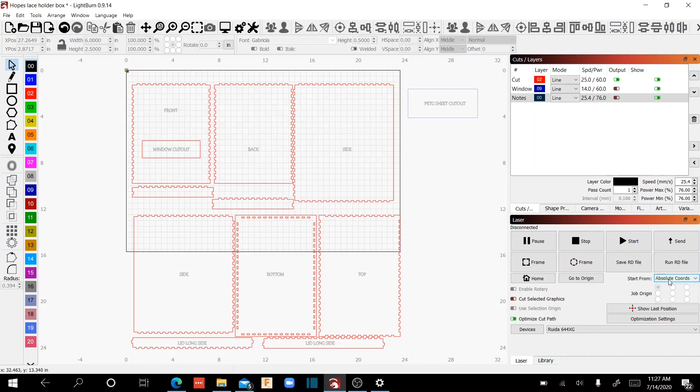Okay, so if for some reason I wanted to try to cut this out in one fell swoop, I couldn't do it, because if I was under absolute coordinates and I just said, hey, show me the piece, there's no way. Matter of fact, I would get a warning that I was outside of the bed of the laser. It wouldn't allow me to do it. So I can't do it this way. I'm going to have to slice these cuts up some way.

A couple of options you have: you could take this area down here, turn it a different color, turn that particular layer off, and then cut this layer, and then use another layer, move this out of the way, put it in. But that can be confusing sometimes, because the more layers you have that are doing the same thing, the more chance that you might make a mistake.

I personally like to have all my cut layers on one layer. That way I know I don't have a bunch of layers here that I have to wade through. But there's a lot of different options in LightBurn to get this job done in a really easy way. So you could generate an additional layer, color it differently. My preferred method, and one of my favorite methods, is I'm going to leave all of this as a red layer. And you might be wondering, well, how are you going to be able to do this? And I'll show you how.

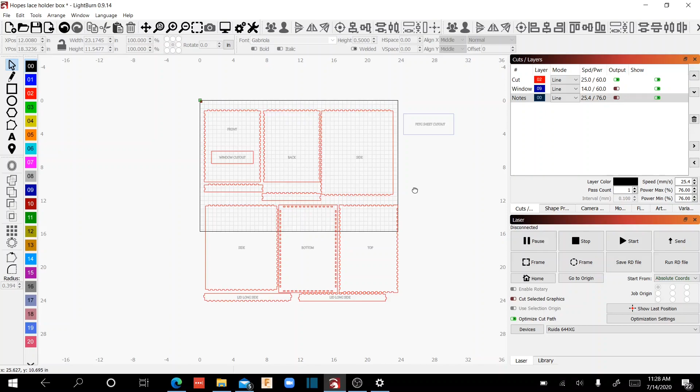One of the features in LightBurn that I use on almost every project is called Cut Selected Graphics. Okay, so once I have the Cut Selected Graphics button turned on, and again, I use this all the time. This is one of my favorite features of LightBurn, and you'll see why here in just a little bit.

The other thing I'm going to do is come over here and turn this to user origin. I'm going to go in the top left hand corner. Now if you don't have a Thunder, you can select pretty much any corner you want. This is personal preference. I'm going to select the upper left hand corner, and you'll notice now that the green dot has showed up in the upper left hand corner of where my work starts.

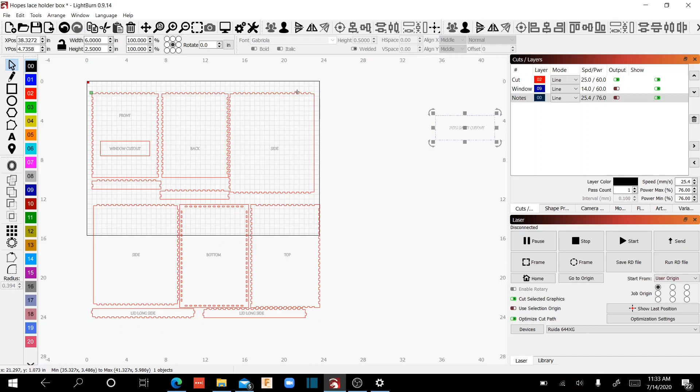And so one of the things you got to be careful of, and this catches me on occasion, is always pay attention to this green dot. It should be in the very corner of where you want your work to start. If I take this graphic that I'm not cutting out, and you notice that it's turned off, and I move that up, watch what this green dot does. Now it moves off your work.

And so when you're trying to cut something the size of your laser bed, you got to be very careful about where these are at. So just remember, even though they are turned off, they will affect where your user origin is going to be. So if I selected my user origin and I left it like this, that laser head is going to drop down that much before it starts to do its cut, which will make your cut way off in your laser bed.

So, you know, a lot of us have a lot of things kind of on the side. You just got to make sure that it's not affecting where your origin lies. So just always pay attention to that green dot when you're using user origin. Okay, so once I've got user origin, I've set it basically right here in the corner of my piece of 12 by 24 Baltic birch plywood.

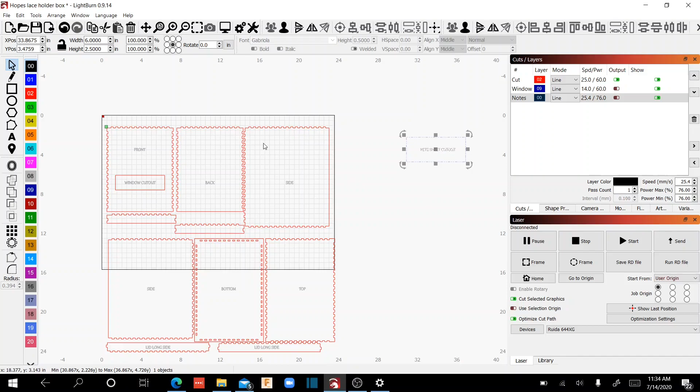Here's what I'm going to do. I'm going to leave all these alone. You notice that we've got just one single red layer. I've got it turned on to cut. And because I've got the Cut Selected Graphics radio button on now, I'm going to come over here and just select that top section. And then if I preview it, you'll notice that it just gives me that top section that it's going to cut. It completely ignores all of these red parts down here.

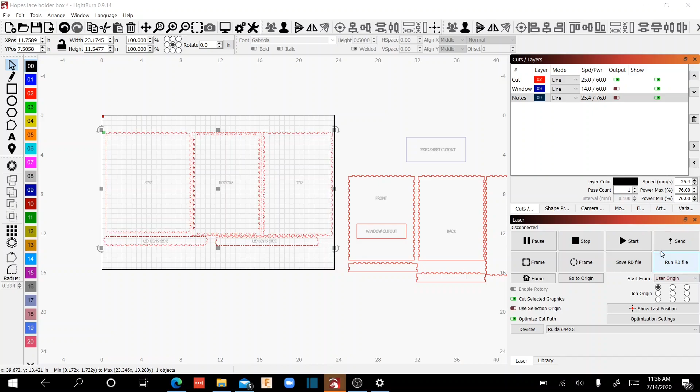Okay, so what I would normally do is send that to the laser, cut it out, and then once that's all cut out, I would come over here. This is grouped together. I would move this out of the way. I would grab this, pull this up and in. I would select this, preview it, make sure that it works. Boom, there it is. Go ahead and send it to the laser. And now I've had the ability to cut all these parts out with the same layer.

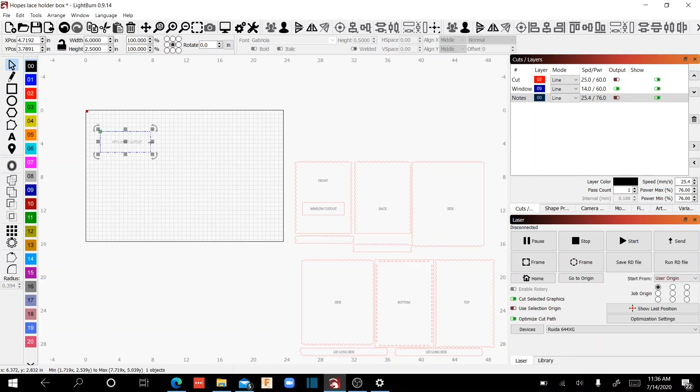So now that I've got these parts cut out, I've got the window to cut out. This is a PETG. It's a little thin plastic film. I'm going to drag this over here. I'm going to load my PETG, refocus my laser, right? And I'm going to turn this off and my blue layer on now and select it. And because Cut Selected Graphics is on, even though I've got all these other things on my screen, it's only going to pay attention to what I've got selected. Okay? And boom, now I'm done.

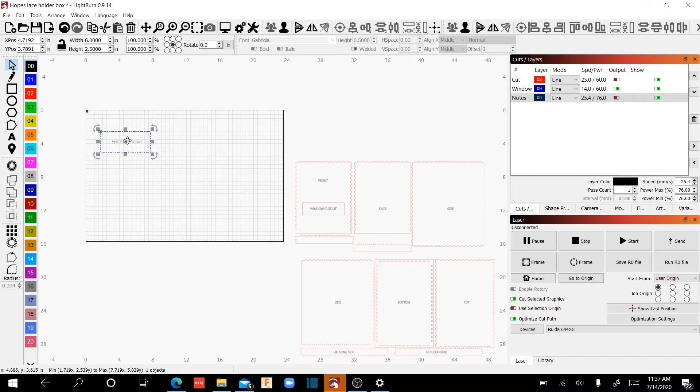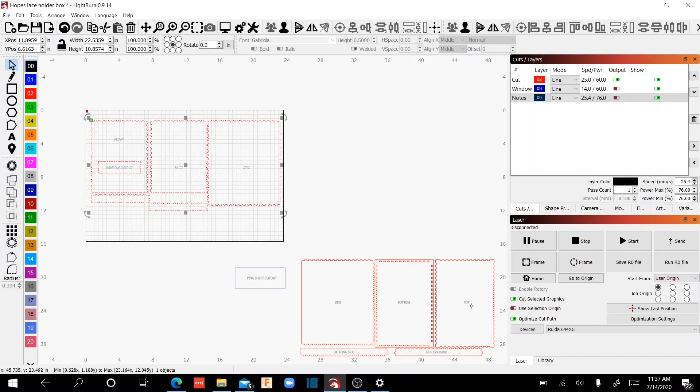Here's the other reason why I really like this feature, and I had this happen to me not too long ago. Let's turn that on and that back off, and I'll move this back like I'm going to cut it again. What's really nice about having the Cut Selected Graphics radio button on is, let's say that I cut this out, but I forgot to select this window. So this is what happened. I've got it ungrouped, and I'm going to just select these individually.

And I previewed it, and I cut it out. The only problem is I forgot this window wasn't selected. So when the laser was all done, I realized that the window, this hole that's supposed to be right here, wasn't selected. Well, it was no problem at all, because I could deselect everything else, only select the window, leave everything alone, don't touch it in the laser, preview it, and now I can go back and cut that part that I missed before with no problem.

So the beauty of that is, let's say you got a piece of your pattern that isn't cut out as far as it needs to be. It didn't cut all the way through. The nice thing is, if you have to, you can ungroup that and select that one line that didn't cut out well, and only that line, and relaser it, and that way you've saved that pattern.

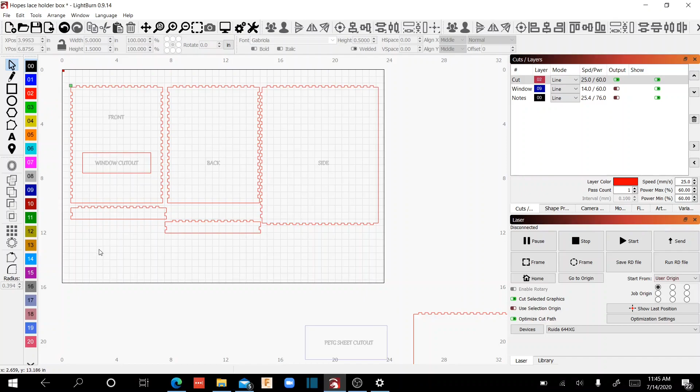A very useful thing to use with this: Cut Selected. Now, if for some reason you don't select anything and you've got this Cut Selected Graphics on, it's going to tell you, hey, I'm not cutting anything out because you have no selection made. So just keep that in mind.

It's a great feature, I use it all the time, and you can see you can have all kinds of things on your whiteboard here, and you're just dragging them over, selecting them, and then cutting them. It's pretty fast and efficient. Initially, before I learned this feature, I would make two different files, I would make different layers, and it was a pretty inefficient use of my time. So that's probably one of the biggest features that I really like about LightBurn.

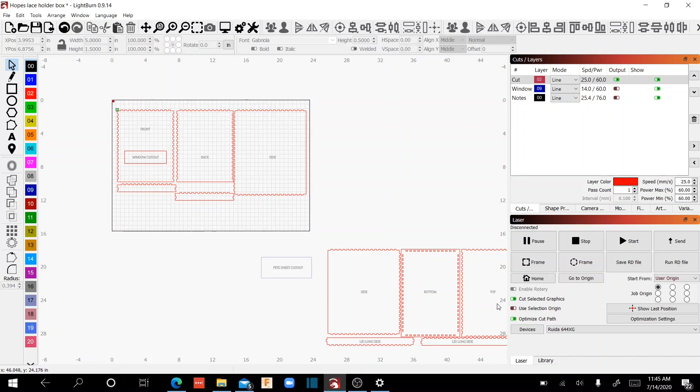Okay, so another feature in LightBurn that I really like that I don't see talked about much, and I use it for several different things. We all know when we're making files, maybe something we haven't made before, we're making lots of notes, we might have some links or websites that we've gone to for files or graphics or whatever it might be. If you come up here to File and Show Notes, you have the ability to key all this stuff in. Matter of fact, if you click on this little radio button, the next time you open this file, this will pop up automatically.

What I use it for is just some basic specifics. Size of the job, maybe if there's a customer approval provided, the information that I needed. So right here, these are web links. Now, it won't link you, but if you come in here and copy that and go into your web browser and paste it, it'll take you right where I needed to be for the particular PETG that I bought.

So you can go ahead and copy and paste your web links in here. I've got where I bought the PETG. I've got what box maker I used and which particular box I used. So if I've got to either change the size of this file or maybe recreate another one in a different size, I don't have to remember, gee, where did I go get that? Or what program did I use that worked so well? I can just copy this, paste it in the web browser, hit enter, and away you go. It's a great feature.

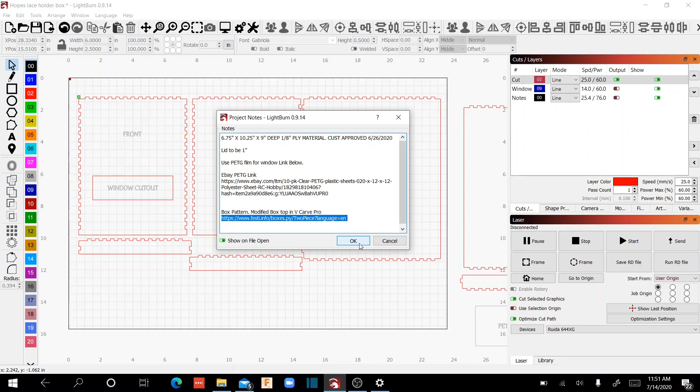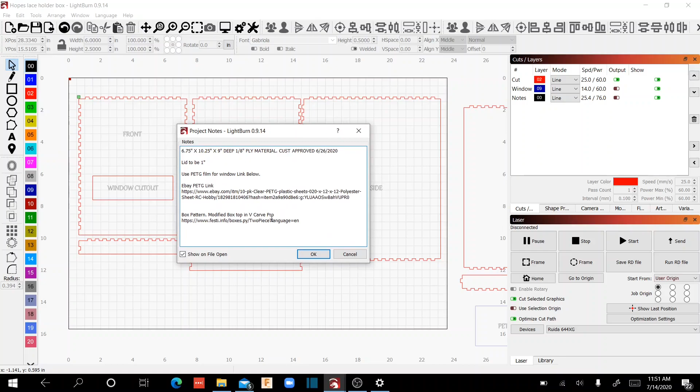And then, if you save this file and I just get out of that and then get into a new one, you notice that it pops up automatically when you have this radio button selected. Another great feature, just another place to put some verbiage. A lot of times before I found this, I was typing in all kinds of text here. Well, the problem with that is it gets in the way and it can affect where your user origin is going to be, depending on where it is on your file. So try this note section out, it's pretty cool.

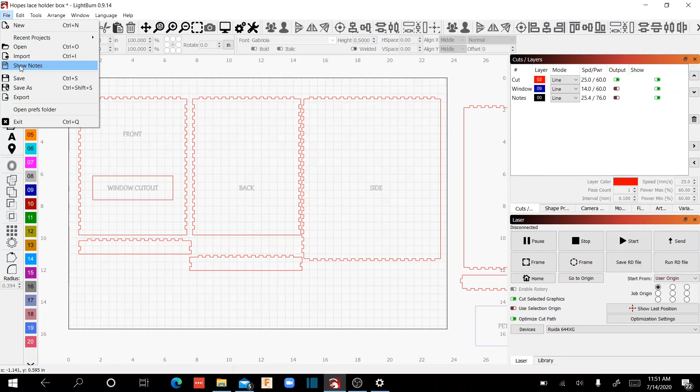I really like it. Again, it's under File. If there aren't any notes in there, you'll just have to select it the first time. If it's highlighted like this, that means you have notes in that particular file.

Anyway, a couple of different things that I use in LightBurn to help me be a little more efficient and handle jobs that are bigger than the bed of my laser. As you can see, the Cut Selected Graphics and the Notes feature in LightBurn can really go a long way to take a project like this, that's a little bigger than the bed of your laser, and make it easy to cut out and make bigger projects. I hope you enjoyed the information.